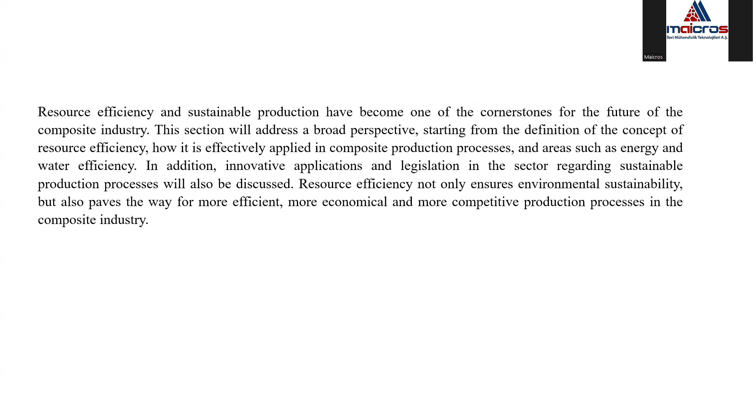Resource efficiency not only ensures environmental sustainability, but also paves the way for more efficient, more economical, and more competitive production processes in the industry. So again, what is resource efficiency and why is it important? So we know that resource efficiency tries to use natural resources effectively, minimize waste, and reduce negative environmental impacts.

So this concept is not only about optimizing production processes, but also about making these processes more sustainable in environmental, economic, and social terms. But especially in the composite industry, resource efficiency is the whole of the strategies implemented to minimize material and energy consumption, reduce waste, and use natural resources as much as possible and as efficiently as possible.

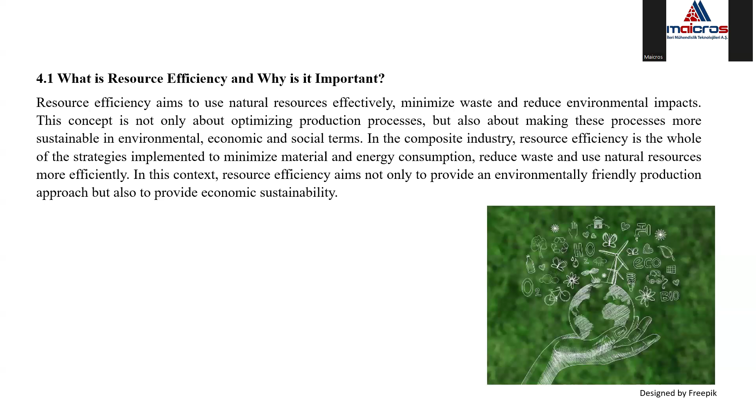The basic principles of resource efficiency can be said: reduction, reuse, recycling, and efficient production techniques. So in the reduction part, preventing unnecessary material, energy, and water use in the production process. So that means minimizing waste and emissions. For the reuse part, making used materials usable again, for example, could be a good choice. So recycling or second-hand material use will be an important parameter for the composite materials.

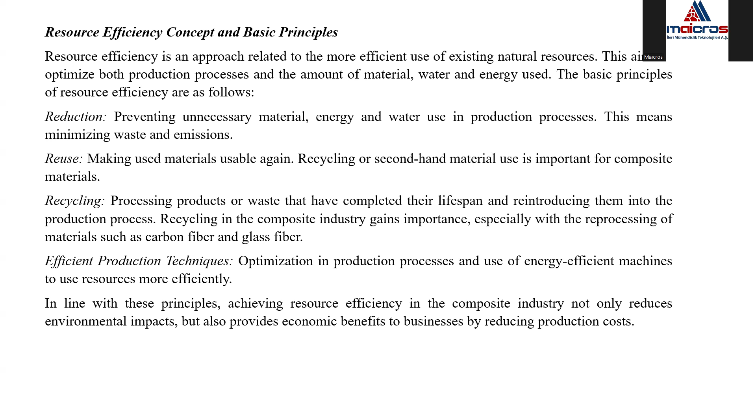Recycling, so processing products or waste that have completed their lifespan and reintroducing them into the production process. So recycling in the composite industry gains importance, especially with the reprocessing of materials such as carbon fiber and glass fiber. And also efficient production techniques, optimization of the production process, and use of energy efficient machines to be able to use the resources more efficiently.

So we see that resource efficiency is an important element in the composite industry. So even though the composite industry is an energy intensive and material consuming sector, if the principles of resource efficiency are applied in the production part, it may play a critical role. It's also important for creating competitive advantages in the composite industry.

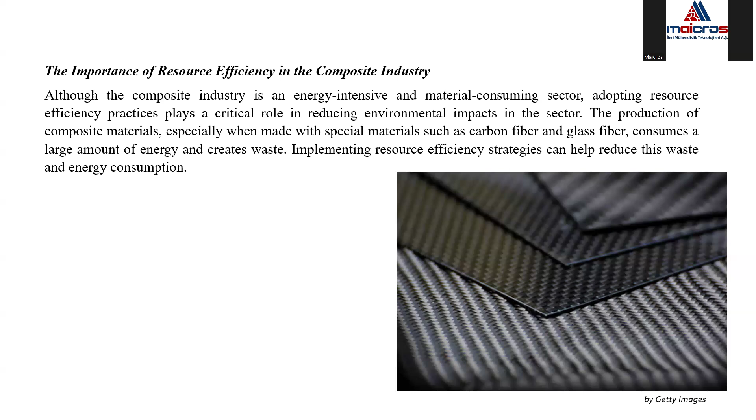For example, achieving efficiency in areas such as material design, optimizing production processes, and managing waste reduces business costs while minimizing their environmental impacts. In addition, such practices help companies achieve global sustainability goals, which can create larger markets and also new business models and opportunities. So that's why resource efficiency is an approach that not only a single company, but the entire industry should adopt, because all the sectors are linked to each other.

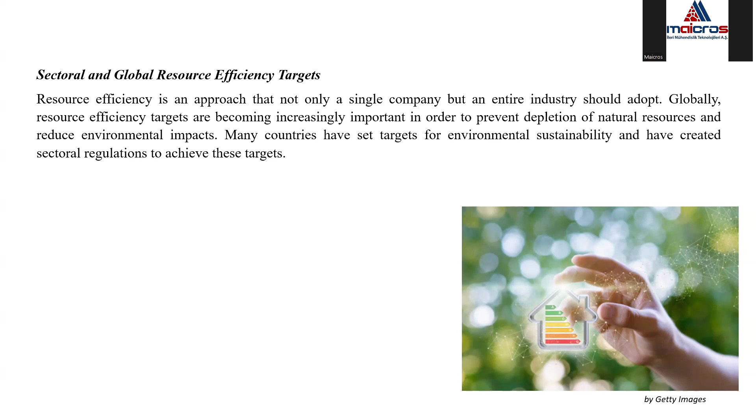So globally, resource efficiency targets are becoming increasingly important in order to prevent depletion of natural resources and reduce negative environmental impacts. So if you look at the global targets for the composite industry in terms of resource efficiency, a couple of points can be made. One of them is low carbon footprint. So targets to reduce carbon emissions will encourage the composite industry to switch to more environmentally friendly production techniques. That can be achieved by making energy-intensive processes such as carbon fiber production more efficient.

Another element could be waste reduction. So the goal is to minimize waste in the industrial production processes. So for composite manufacturers, it will be important to adopt waste management strategies to reduce the negative impacts to the environment. Innovative material use, so the use of renewable, biodegradable and recyclable materials is increasing. Zero waste target, so many sectors are developing various strategies to achieve a zero waste target. For the composite industry, this goal can be achieved through methods such as recycling, reuse, or material optimization.

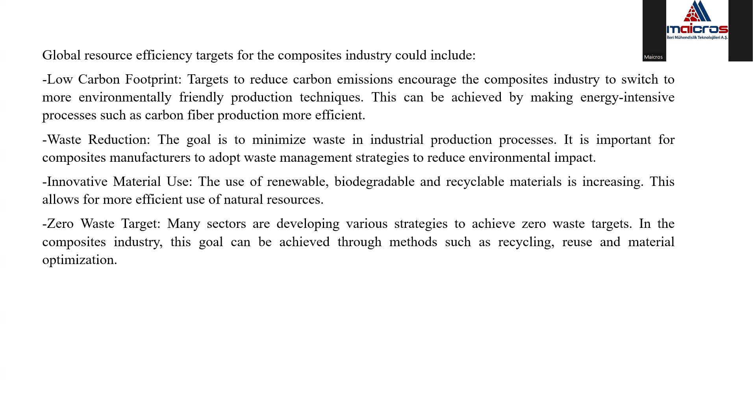So in addition to helping the composite industry become more sustainable, these targets also enable companies to stay one step ahead in global competition. The resource efficiency not only reduces environmental impact, but also provides economic benefits to businesses, increases their market share and ensures sustainable growth in the long term.

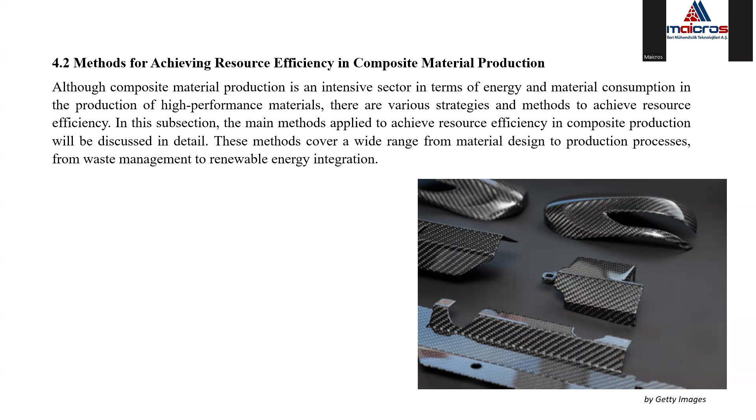So a couple of methods could be mentioned to achieve resource efficiency in the composite industry. There could be various strategies and methods to achieve resource efficiency in the industry. So some of them are material design and efficient production processes. So making the steps sustainable in the design stage and then production processes. So it starts with the right material selection. It is also of great importance to optimize the technologies used in the production processes, to prevent material loss and shorten production time.

So optimum material selection: the type of materials used in composite production directly affects efficiency. The material selection should be done carefully in terms of functionality and minimizing environmental impact. So in particular, choosing materials obtained from recyclable and sustainable sources optimizes resource use. In addition, designing materials used in the production phase to create less waste can also increase the process efficiency.

Other factors could be efficient production techniques. So traditional methods used for composite material production generally lead to high energy and material consumption. However, this efficiency can be increased with modern production techniques. For example, high efficiency infusion methods, or the use of automation and sensor technologies to reduce error in the production techniques, or some non-destructive testing technologies.

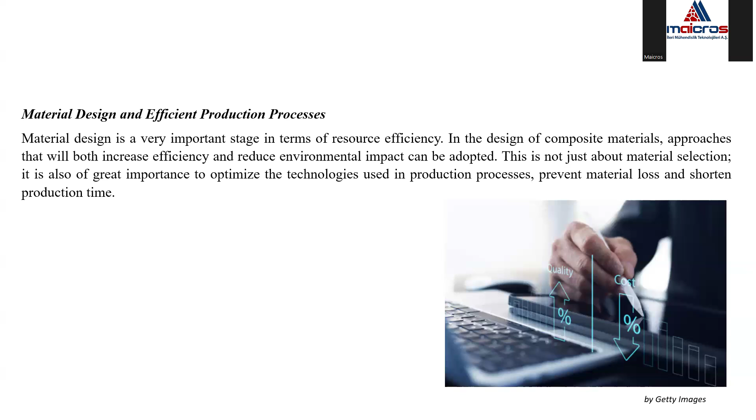Innovation in material design also could be an effective method to get resource efficiency. So optimizing material components in the design phase, using each component in minimum amounts and manufacturing with lightweight materials are elements that increase resource efficiency. So another method to get resource efficiency will be waste reduction strategies. So minimizing waste in the industry is a critical step to achieve resource efficiency.

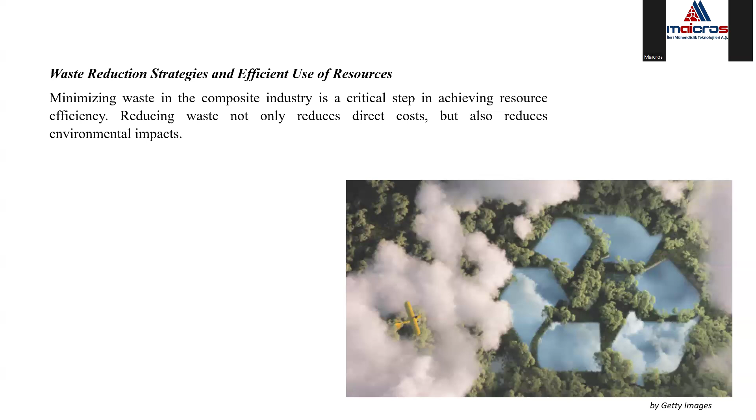So waste management and reduction, for example, could be a critical part of the waste reduction strategies. And at the same time, reuse and recycling of waste. So in the production phase, recycling of valuable materials, especially carbon fiber, is of great importance. Such materials can be reprocessed and put into use when they become waste. So the direct reuse of waste generated in the production processes ensures more efficient use of resources. And as a last step, maybe zero waste strategies. So adopting the zero waste principle is one of the fundamental strategies for efficient use of resources in the composite industry.

Another strategy could be integration of renewable energy resources, such as use of solar and wind energy in the production processes, or energy recovery and waste energy use. For example, energy recovery is an important strategy in the composite production process. So waste heat or energy generated during production can be recovered or incorporated back into the production process. So that method increases energy efficiency and provides direct cost savings for the companies. So energy efficiency stands out as an important strategy, especially in the composite industry, which is an energy intensive industry.

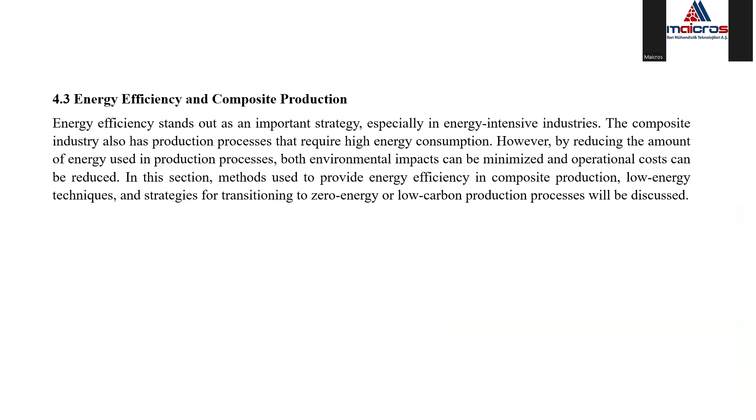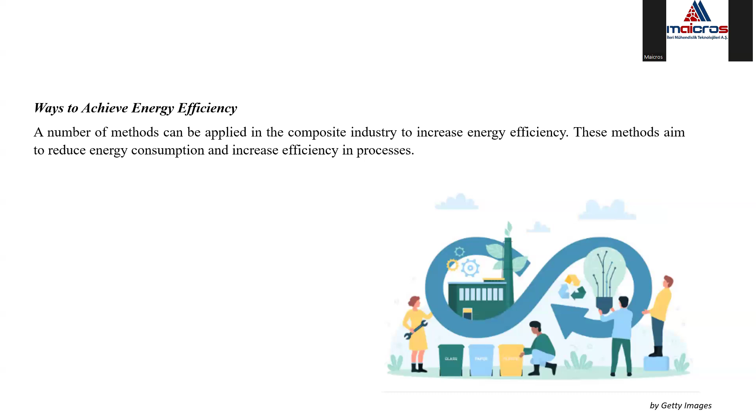So how to achieve energy efficiency? There could be many ways, but a couple of them are optimizing the production processes. So optimization of all of the elements in the production phases, or energy monitoring and management systems could be an effective way. So it may be useful to use an energy monitoring and management system to effectively manage energy consumption. This system instantly monitors energy used in production processes and detects possible inefficiencies. So providing the necessary improvements, energy management software, for example, analyzes energy use, identifies inefficient areas, and provides optimized energy consumption in processes.

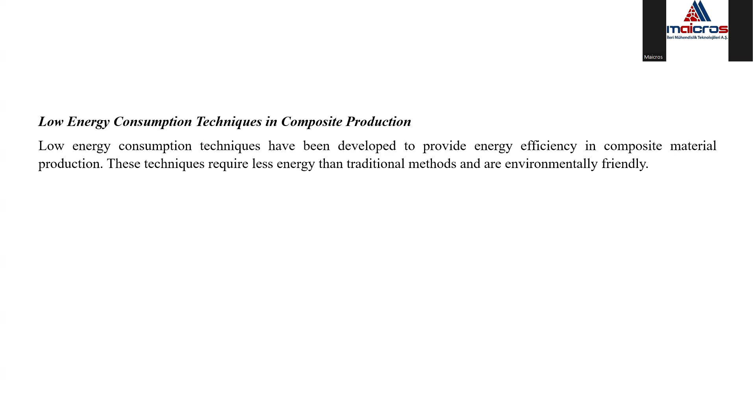And for example, low energy consumption techniques could be also an important strategy. So instead of high energy consumption techniques, maybe lower energy consumption techniques in the production process could be preferred. These methods could be integrated composite production techniques or heat shock technologies or accelerated polymerization methods. So it depends on the type of the manufacturing, and maybe some of the technologies could be used.

So transition to zero energy or low carbon production process may offer great opportunity for the future of the composite industry. So production with renewable energy source can be achieved by integrating renewable energy sources. Renewable sources such as wind energy, solar energy, and biomass may be used to provide energy in the composite production facilities, or use of low carbon materials.

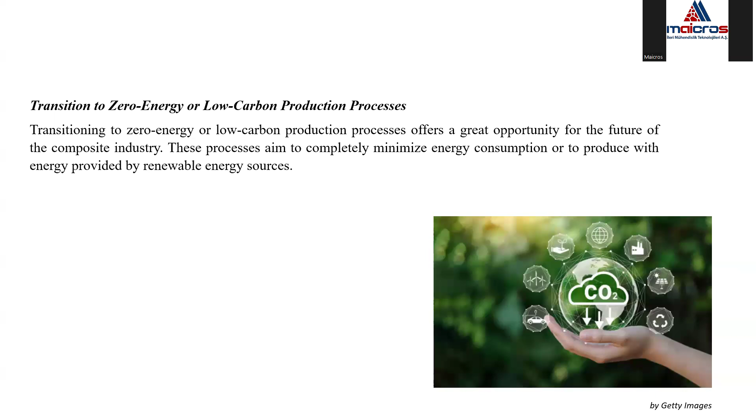So some alternatives of the materials used in the production process can be preferred, such as bio-based resins or recycled materials. Energy efficient equipment: carbon emissions can be reduced by choosing energy efficient models of equipment used in composite production, for example. And also carbon emission reduction methods are some strategies that can be used to transfer or convert the industry to zero energy production.

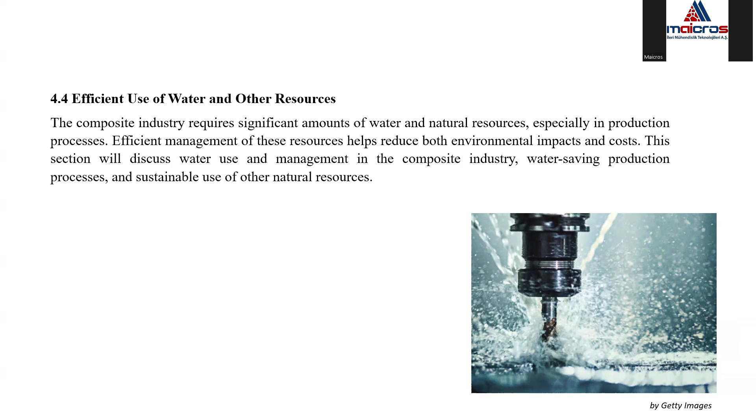So one of the critical points to get resource efficiency is the use of water and other resources in an efficient way. Because water is used for a number of different purposes in the composite industry, such as cooling, cleaning. However, improper management of water can lead to serious problems, not only for the company, but for the environment and economically. So therefore, efficient use and effective management of water is of great importance.

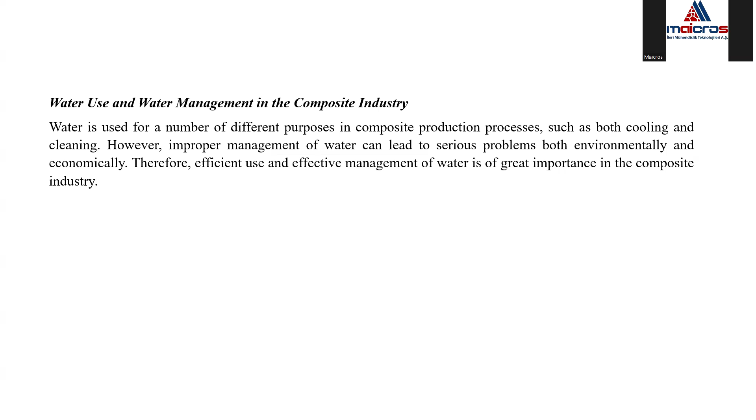So water use in composite production is generally for cleaning, and maybe sometimes transportation in some processes. However, excessive use of water not only increases operating costs, but also can lead to depletion of water resources. So therefore, water must be used efficiently at every stage. Water should be recovered in the production processes, in the recycling processes, or the reusing processes. And also water consumption should be monitored by the systems. Maybe that's correct for the large companies, but it could be a very efficient way to use the water.

And also, maybe some of the strategies can be used to save water use in the production process. Maybe with closed circuit water system. That means reuse of water in the composite industry may be possible with closed circuit water systems. So in this type of system, water is continuously purified and reused. Another strategy could be low water consumption process. So new production techniques could be developed that minimize water requirements in the production phase. For example, instead of water cooling methods, maybe air cooling methods could be used.

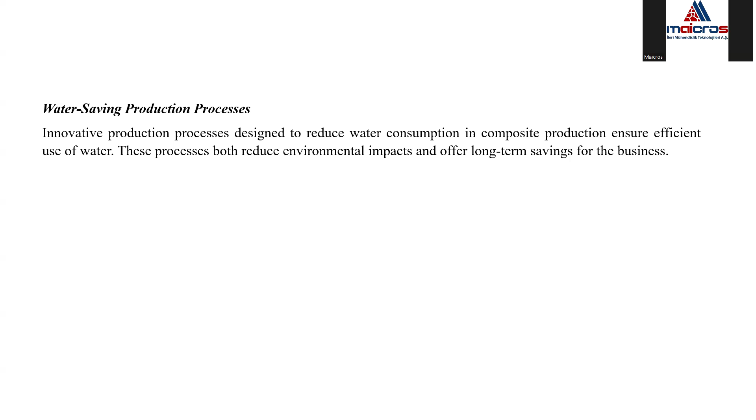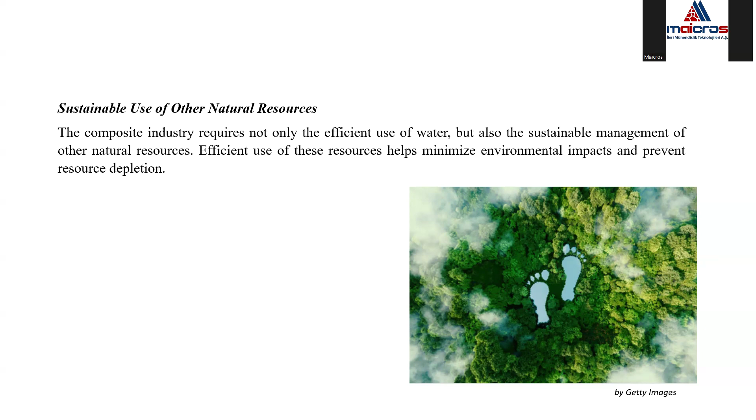In addition to water, sustainable use of other natural resources could be an effective way. For example, energy and raw material use, or evaluation of waste and byproducts, or use of bio-based materials or natural materials. Alternative to the current material could be an important parameter. And at the beginning, as we said before, sustainable design or eco-design approaches could be very useful to get the efficiency in the production.

So we understood that resource efficiency is a critical factor, but to make it more efficient or make it more durable in the industry, global and local legislation, regulation, and standards have very great importance in shaping the whole industry. So compliance with these legislations in the composite industry is crucial in terms of adopting the production processes and achieving economic efficiency.

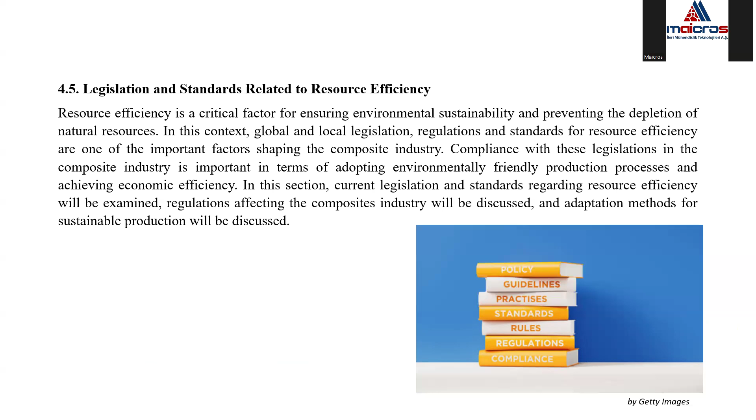So composite material production is usually linked with the international market. Many of the composite products are imported. So a legislation which is global is also an important part of the transformation of the industry to a more sustainable way. So it could be European Union legislations, for example. The European Union has developed comprehensive environmental policies and regulations to promote sustainability. For example, the EU's Green Deal includes targets set for reducing carbon emission. And also the United States legislations could be an important part of this legislation activities.

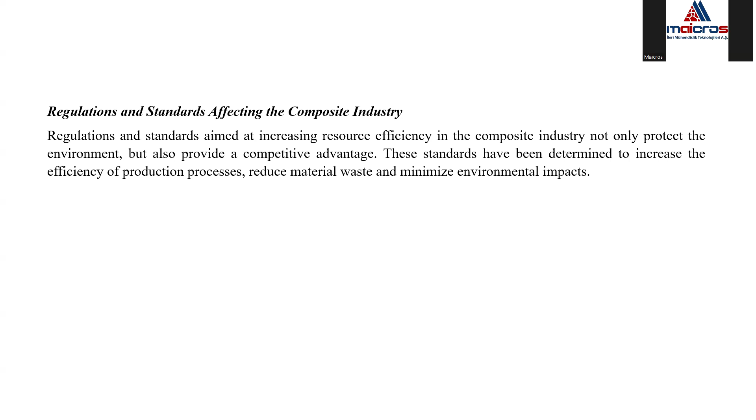And also local legislations and national regulations are important for the manufacturers. So the regulations that composite industry manufacturers must comply with at the local level may vary depending on the environmental standards of that country. So those are some practices that can be made to get a more sustainable approach in the industry. So regulations and standards aimed at increasing resource efficiency in the industry not only protect the environment, but also provide competitive advantages for the companies that apply the strategies.

For example, methods for compliance for sustainable production could be many. Some of them are adoption of eco-design approaches, energy efficiency investment, implementation of waste management and recycling protocols, and employee training and awareness is also important. So adoption of eco-design principles in composite material production will reduce the negative environmental impacts of the production phases, so that it optimizes material usage and will reduce waste.

For the energy efficiency investment, composite manufacturers can use energy efficient machines and low energy consumption processes to achieve energy efficiency. In addition, the integration of renewable energy sources is an effective method to reduce energy cost and promote sustainable production.

And the composite industry can adapt to recycling processes by improving waste management, for example. The recycling of waste, optimizing raw material use, and strategies for zero waste targets are important steps for compliance with the regulations.

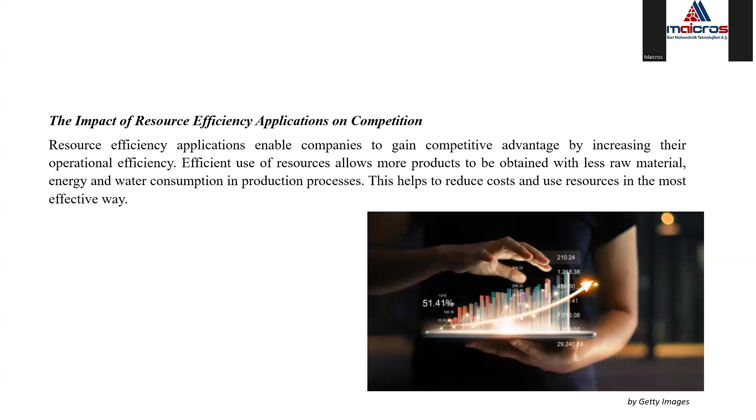The companies that adopt sustainable production methods can attract more customers and business partners, which reinforces the competitive advantages, for example, in the market. So the application of resource efficiency can provide companies with a direct cost advantage. That advantage comes from low cost production, as mentioned before. So low cost production is an important parameter in this part.

Also, companies with sustainable production methods become more attractive to environmentally sensitive and socially responsible consumers. So such companies can appeal to market segments looking for environmental friendly products, thus increasing their market share.

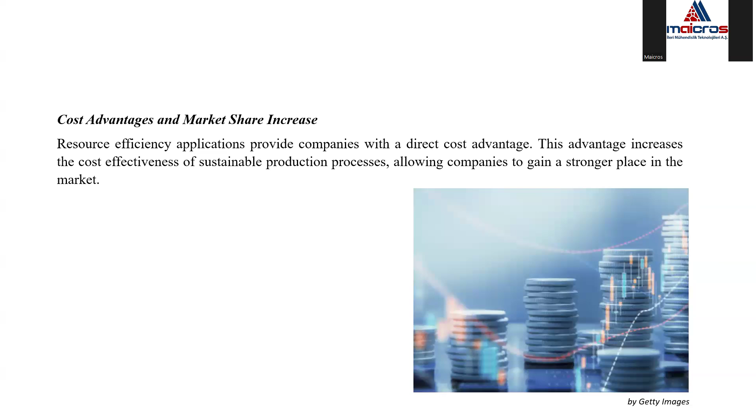And also, with whole strategies and methods, energy consumption is reduced with resource efficiency and the integration of renewable energy sources can be achieved. So that helps companies adopt more sustainable pricing strategies by reducing the energy cost. All the strategies and methods will help creating brand value with sustainability for the company.

Since sustainability has become an increasingly important criterion for today's customers and the business world, composite companies or industries can increase their brand value with environmentally friendly production processes and resource efficiency practices.

So achieving resource efficiency will help companies create an environmentally friendly image that can influence the preference of the environmentally conscious consumers and allow them to appeal to a wider customer base. Companies' sustainability commitments increase brand loyalty, for example.

So sustainable production practices reinforce the brand's sense of social responsibility that creates brand loyalty because consumers shop more with the trust they have for environmentally friendly brands. And reputation is also an important parameter in terms of the sustainability and resource efficiency.